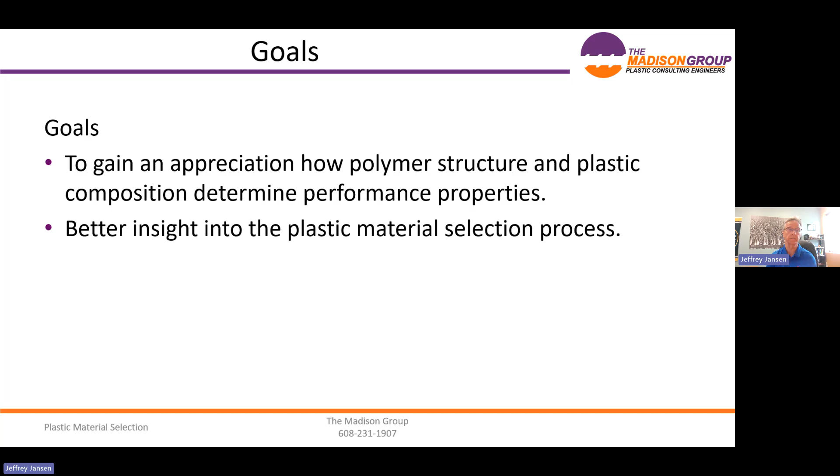It's my goal over the next hour or so that you'll gain an appreciation of how polymer structure and plastic composition determine performance properties, and also get a better insight into that material selection process. We're going to talk about material considerations, plastic structure and composition, and then material selection. So if you were thinking the whole topic would be on material selection and that process, well, that's going to come at the end.

Good material selection that avoids failure requires you to understand a number of things about plastic materials—that's our material consideration. And then you need to understand how structure and composition affect performance, and that's what we're going to be talking about also. Again, to get some background so that we can do proper material selection to avoid failure, because that's the goal here, is to avoid failure.

So why are we talking about material selection? Well, I've been doing failure analysis for about 30 years, and I see the same mistakes being made over and over again. One of the top reasons for plastic failure is improper material selection. I don't mean to imply by that list that it's the number one, but it certainly is in those top 6 things that I see over and over and over again that lead to failure within plastic components.

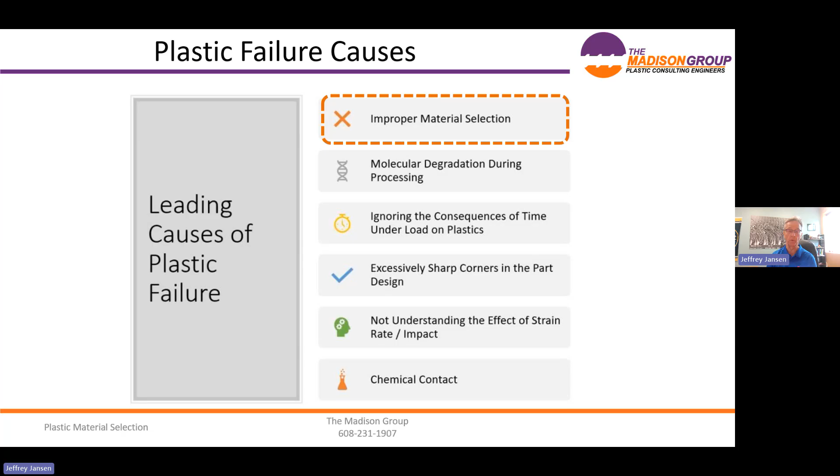And it's not selecting the right material for the application. So again, it's a very, very important topic—that's why we're talking about it today. I also did a survey where we looked at a number of failed plastic parts, and we broke them down into the 4 primary factors for plastic part performance, which are the material, the part design, the manufacturing, and the service environment. Again, those 4 factors are going to determine how the plastic part performs.

When we looked at failures, and I took this survey, material selection and quality played a role in nearly half of the failures that came up. Not saying that was always the primary factor, because oftentimes there are 2 or 3 factors involved in a failure, but material selection played a role in nearly half of those plastic component failures.

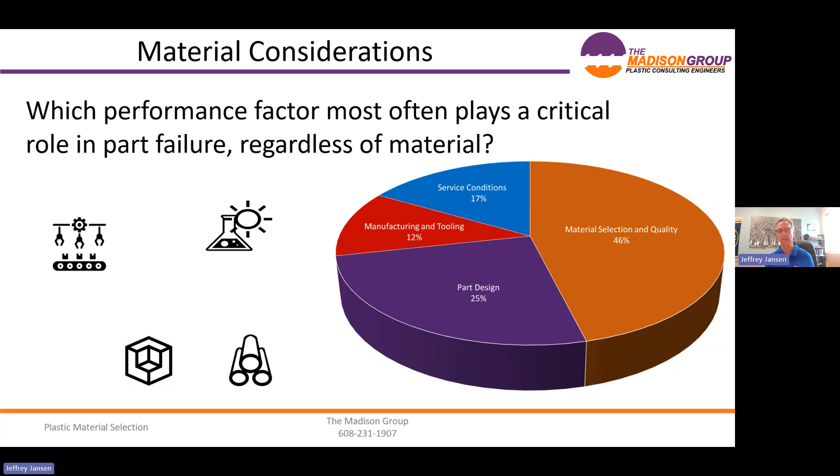So again, reinforcing why it's such an important topic. Material selection is an ordered process to systematically eliminate materials that are unsuitable and then qualify or identify one or two or a small number of materials which are the most suitable for that application.

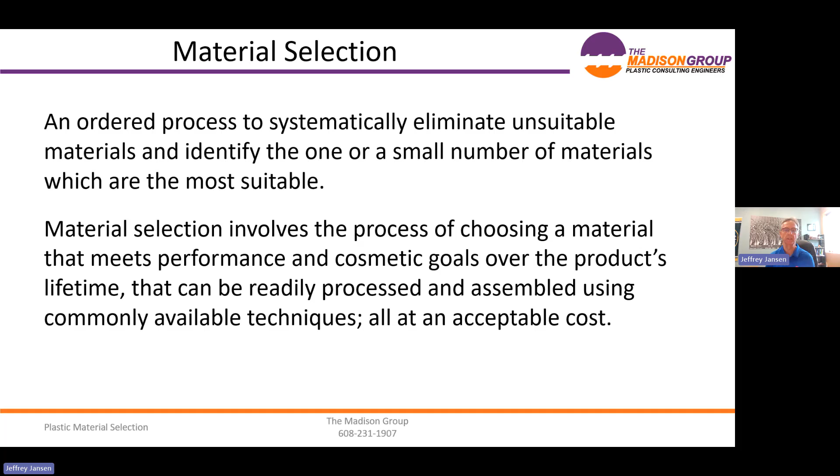We're going to be choosing a material that meets the performance, cosmetic, and really all the goals over the product's lifetime, that can be easily assembled and manufactured at an acceptable cost. So really the whole package is what we're going to be looking at. Later on, when we get to that process, you'll see how it all comes together.

So failures due to poor material selection, as I've indicated, are very common. I think they're essentially related to a lack of awareness and understanding of polymer structure and composition and how that affects performance. Because when we're talking about improper material selection, we're talking about material that doesn't meet performance - and it's not just the end use performance, what it sees in the field, but performance as in meshing with the design and also being manufacturable.

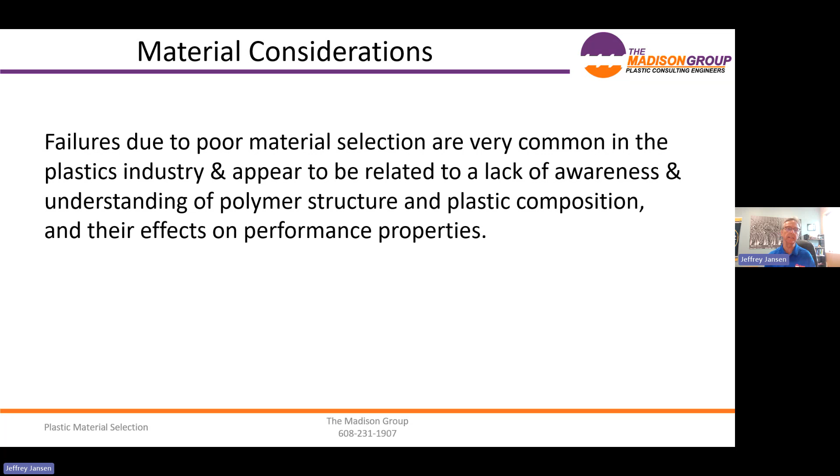So that's really what that plastic material needs to be able to perform. And like I said, I think it all relates back to not having a great understanding of how structure and composition contribute to that performance.

So when we look at material selection as part of design and development, new product development, or the entire product life cycle, it's imperative that designers and engineers understand the fundamental nature of plastics. I'm going to quickly go through - and we could spend a lot more time on each of these topics - but talk about these things that if you're going to do material selection, design parts, or even manufacture parts, I think if you work with plastics you need to understand these key material considerations.

Especially important when you're going to select the material: understanding that plastics are nonlinear viscoelastic materials. This is a fundamental aspect - that plastic materials are viscoelastic, meaning they display both viscous and elastic behavior at the same time.

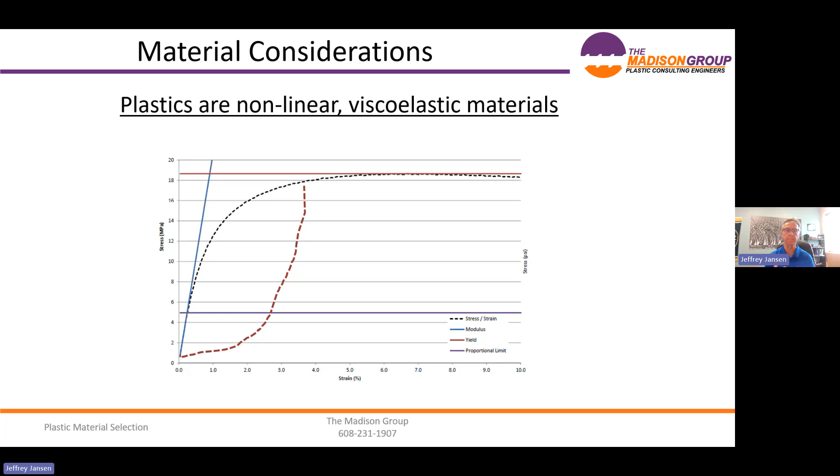They're also largely nonlinear. No matter what property you're looking at, plastics are nonlinear. Certainly it's very clear to see this in a tensile stress strain curve, but no matter what properties we're looking at, we see a lot of nonlinearity within plastic materials.

Plastic materials have temperature-dependent properties. That means whether we assess properties - and I'm illustrating mechanical properties here, but they can be any type of property - whether we're evaluating the material at room temperature, maybe -40, maybe +50 degrees C, those plastic properties are going to be dependent on that temperature.

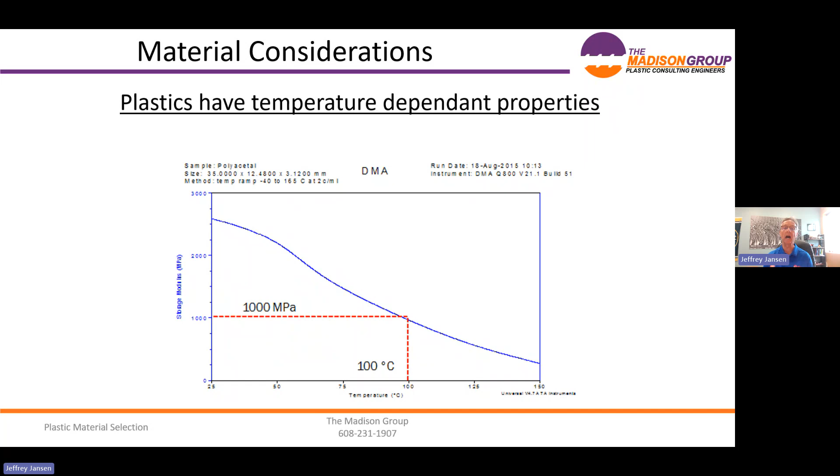And relative to metals, plastic material properties change over a relatively short temperature swing. It's not at all uncommon to see properties shift dramatically over 10 to 20 degrees C, whereas for metals you really have to be talking about 100 degrees C or more before you'll notice an appreciable change in most properties.

Plastics have time-dependent properties. That means not only are they dependent on temperature, but on how long that product is in service. I'm not really talking about molecular degradation, like UV or oxidation - I'm talking about if you place your plastic part under load, the mechanical properties of that part will change over time.

Because they're viscoelastic, time, temperature, and - as we're going to see in just a minute - strain rate are all entangled with each other. That means those plastic properties are dependent on all of those things, and time, temperature, and strain rate all impact the plastic materials in the same way. They're all relatable to each other, again, because they're viscoelastic. So plastic materials have time-dependent properties.

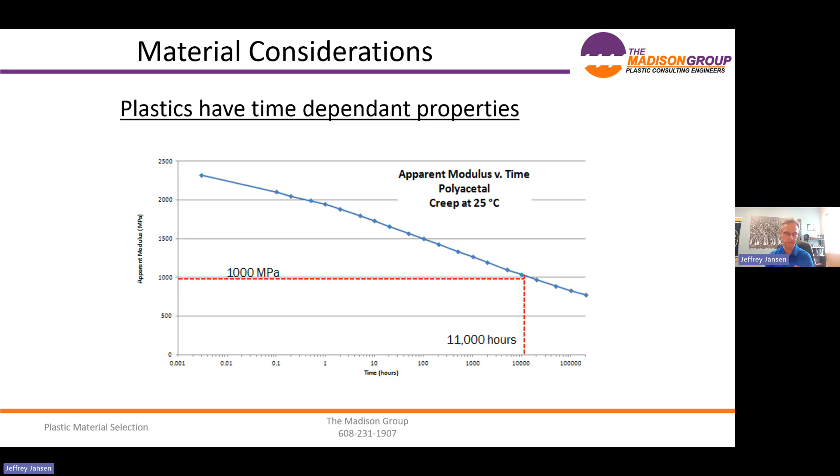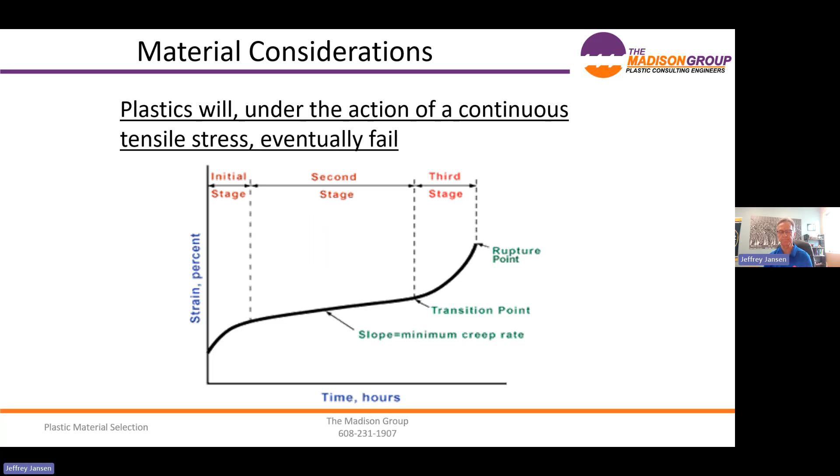And as a continuation of that, if we put our plastic material under continuous tensile stress, that product will eventually fail. Now, maybe in an inordinately long period of time, like 100 years, or it may be within the life cycle of your product - could be 5 years, 2 years, half a year. Again, if you place that part under continuous tensile stress, it will crack eventually.

And the third leg of that stool is that plastic materials are strain rate dependent. How fast we pull or how fast we load a material matters to what its strength is going to be. That's why plastics are very impact sensitive, and a lot of plastics will fail under impact loading. So temperature dependence, time dependence, strain rate dependence.

That means it's kind of where we're going to be looking at when we think about a data sheet. If somebody says, how strong is this material? The only answer that is acceptable is it depends. What does it depend on? It depends on the temperature, how long it's been under load or is expected to be under load, and what the strain rate is. So again, when we start to think about data sheets, they present a nice number for us, but we need to think about what that number really means.

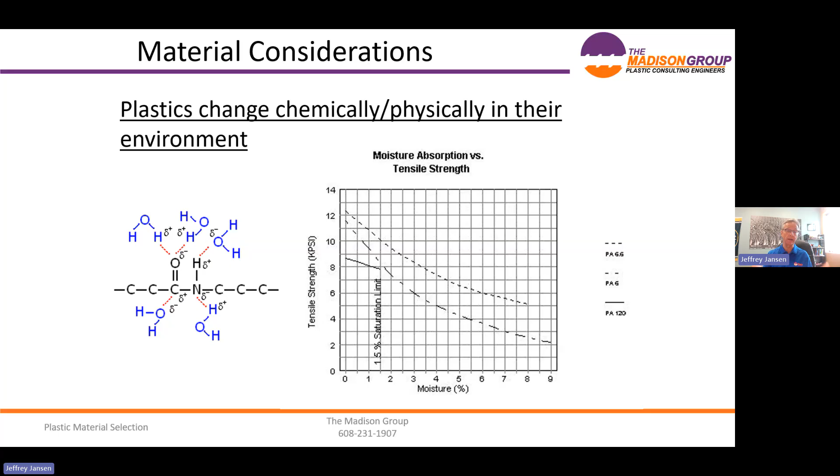Another material consideration is that plastic materials will change chemically and physically in their environment. The best example here is nylon and water. Nylon absorbs water, and when it does that, its mechanical properties change. As it absorbs more water, its impact properties get better, but its strength goes down. So there's a trade-off there: strength versus ductility, dry versus wet. And the same thing can be found with other plastic materials. Nylon and water is just the best example.

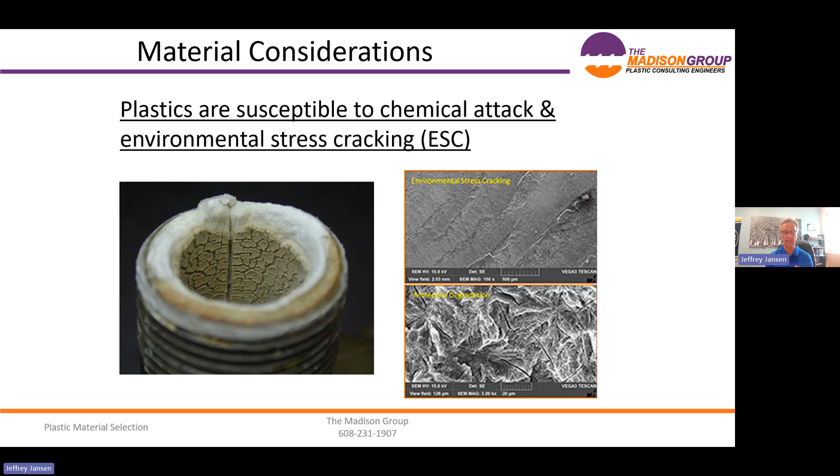Plastic materials are susceptible to chemical attack and environmental stress cracking. Plastics are great materials, but if they have an Achilles heel, it's that they don't play well with chemicals. And when you're going to think about material selection, you need to think about what chemicals are going to be present in that environment.

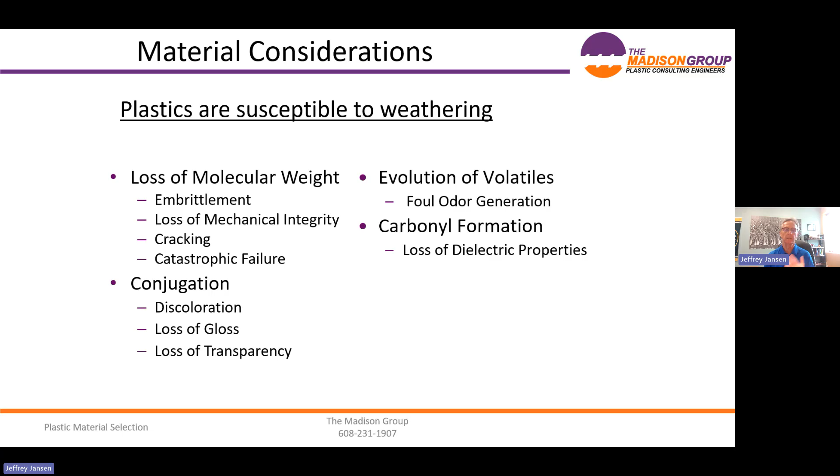Plastic materials are susceptible to weathering. So if we put them outside, they're susceptible to UV degradation and to the rain and other things that are going on. But principally, we're talking about UV degradation. Again, they can degrade through UV. A number of plastics are somewhat resistant, but others will certainly be degraded.

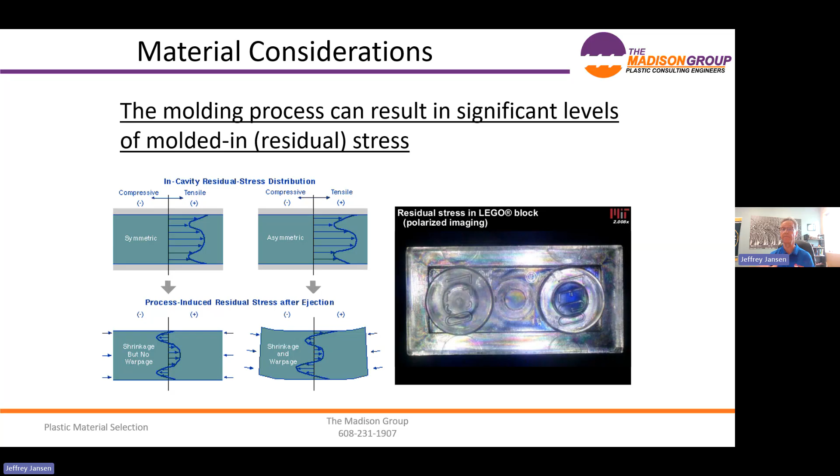The molding process can impart a significant level of molded-in residual stress. And when we think about stress on a plastic part, we have to add both externally applied stresses together with any molded-in residual stresses together. That's the total stress state of that plastic material. So when we mold, we're naturally going to get residual stress in our part. Again, the molding condition can affect how much stress we get through that molding process.

Weld lines, another attribute related more to the molding process - knit lines, weld lines are going to be formed during the molding process whenever we have two flow fronts that come together, particularly egregious in fiber reinforced materials, and our strength is going to be weakest at that knit line location. When those flow fronts come together, we may not get good entanglement of our plastic materials, and if you didn't know that, plastic materials fail mechanically through disentanglement. So if we don't have good entanglement, good fusion at those knit lines, we're going to have an inherently weak location. Again, how strong is your material?

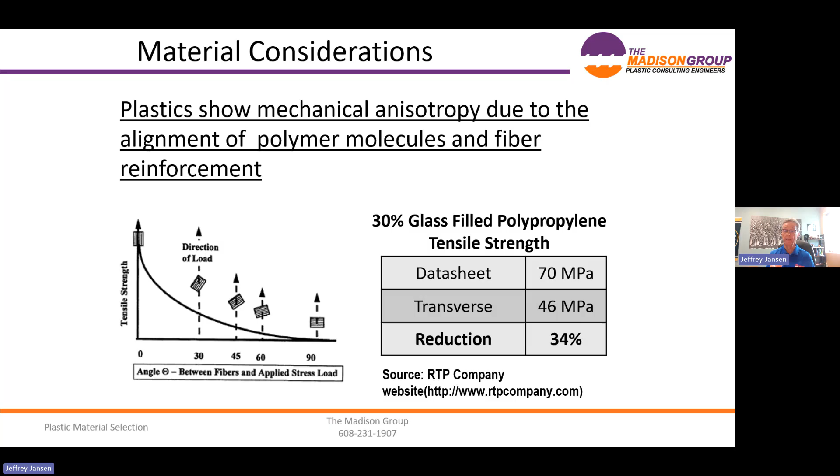It depends. Plastic materials show anisotropy due to alignment of both the polymer molecules and any fiber reinforcement that's present. So if we're going to get tensile strength off a molded tensile bar, that's the easiest thing in the world to mold. All our molecules, and if we have fiber reinforcement, it's all lined up in the right direction. Is that the way that your plastic part is? No, probably not, unless you're molding tensile bars, which I doubt that you're selling a lot of. So on your molded plastic part, think about the strength of that material, the mechanical properties of that material, not necessarily just longitudinal to the orientation of flow, but also transverse to that.

Plastic materials are also notch sensitive. And so when there's a notch, there's typically stress concentration, which focuses and multiplies any stress on our part. So again, our stress state may be higher than we anticipate it's going to be.

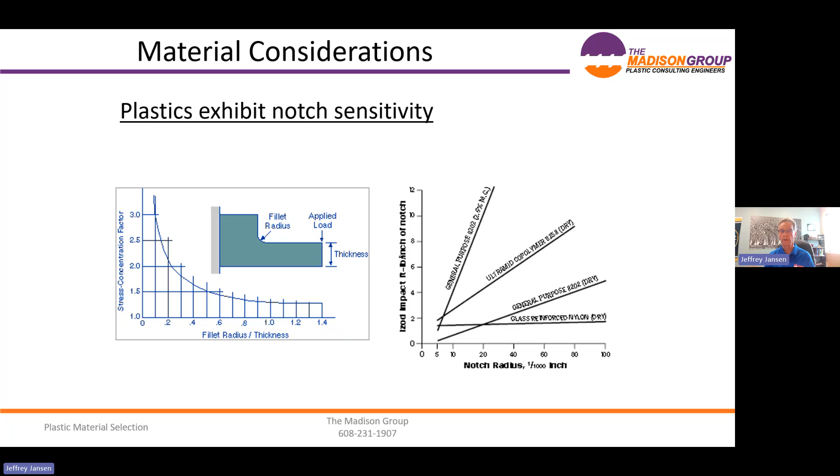Now, I know I went through these relatively rapidly, but it's essential if you're going to be doing material selection that you have a good command of all of these things and how they affect plastic materials, so that then you can say, okay, I'm going to look at my design, I'm going to look at my manufacturing, I'm going to look at my service environment, and now I can start to select a material that's going to weave those three together and not fail.

So we talked about those inherent properties. Now we're going to talk a little bit about composition, because that plays an equally important role. In the material selection process, we have to have an understanding of polymers and additives and their properties.

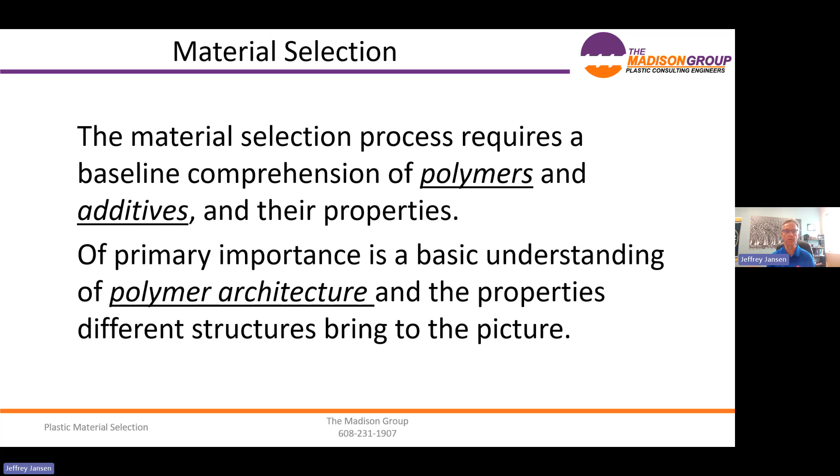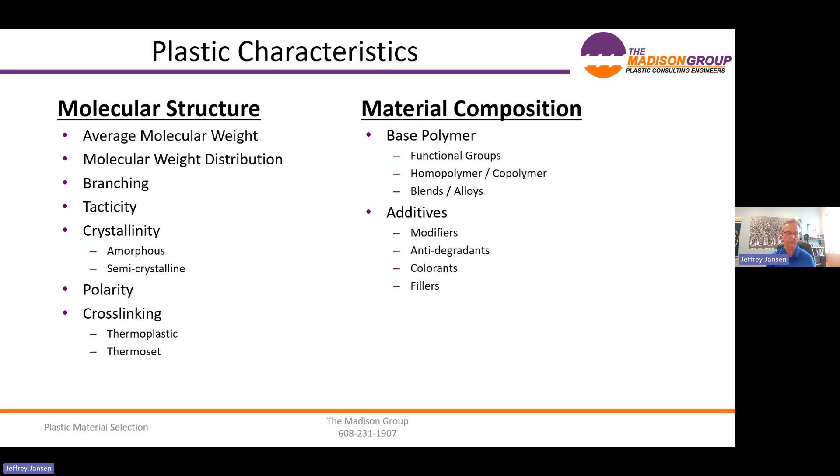This is essential to selecting the right material. We need to know how the polymer architecture, the base polymer in our plastic, contributes to overall performance, and how additives can alter that performance. If we had more time, we'd cover all of these things in much greater depth. We're going to walk through them relatively quickly today, the highlights, so you can understand the key things that determine how that plastic material performs.

There are essentially two ways to form a polymer, to undergo a polymerization reaction. One is addition polymerization, where we're opening up a carbon-carbon double bond. Here we have styrene, with a carbon-carbon double bond. Through the polymerization reaction, we open that up and form polystyrene, building blocks onto that polymer. We start with one monomer, styrene, to get polystyrene.

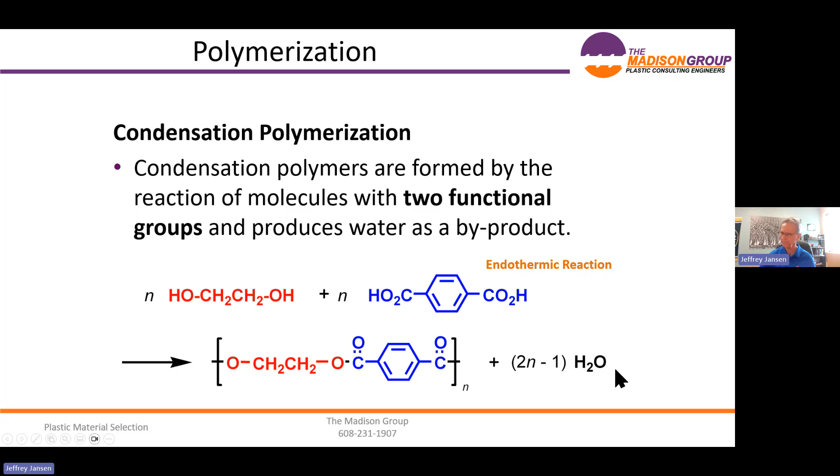The second general way is condensation polymerization, where we start with two different materials. Here we're making PET, starting with ethane diol and terephthalic acid, and we get PET out of it. We react this OH functionality with this acid functionality, and that forms a bond, and we build that way. We also form some water that comes off of our molecule.

It's not essential that you understand the depth of polymerization, but the two different ways to polymerize materials give us different characteristics. The disadvantage of condensation polymers, where addition polymers have an advantage, is that condensation polymers are more difficult to produce, meaning higher cost, generally higher density, which also contributes to higher cost. They're more difficult to process because they typically have a higher melt viscosity, and it's critical that we dry condensation polymers, otherwise we can undergo hydrolysis right in the injection molding machine. All of that means higher cost.

Condensation polymers typically also have a narrower processing window, and we can't get extremely high molecular weights with them as we can with addition polymers. Those are the disadvantages, principally revolving around cost. The advantages are that they give us a wide range of mechanical and thermal properties. This is the material you'd go to if you're thinking about replacing a metal or need a high-end performance material—you're going to go to condensation polymers. So that typically is the trade-off: cost versus performance, condensation polymers versus addition polymers.

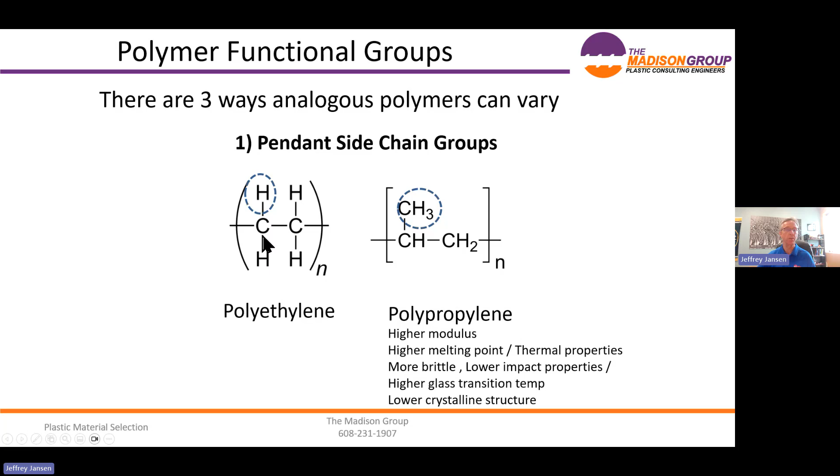When we put these building blocks together, there are a number of ways that relatively similar materials in the same general family can differ. Here we have polyethylene and polypropylene—the only difference is that one hydrogen from polyethylene has been replaced with a methyl group, CH3. Otherwise the backbone is the same, just carbon units with this small difference. That means polypropylene has a higher modulus, it's stiffer, has a higher melting point and better thermal properties. Conversely, it's more brittle, with worse impact properties because it has a higher glass transition temperature, and somewhat lower crystalline structure. All those changes just because of this small difference between these polyolefin materials.

Another way analogous materials can differ is by what's present on the main chain. Here we have PET, polyethylene terephthalate, with 2 carbon units between our ester groups, and PBT, polybutylene terephthalate, with 4. Despite this relatively small change, there's a significant difference: PBT has a lower modulus, is more flexible, but also has higher impact resistance. It has a lower melting point, so lower thermal properties.

And a more crystalline structure compared with PET. It's easier to organize that material into structures. So again, both of these would be thermoplastic polyesters, very similar materials.

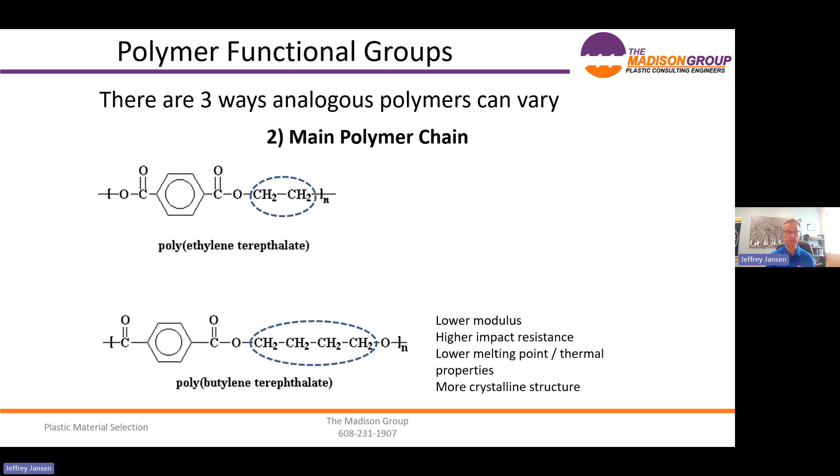The same can be true with nylon. We've got nylon 6, or 6.6, or 12. Again, melting points are going to be different, glass transitions are going to be different, water absorption levels will be different. All the mechanical properties of these materials will be different. Same kind of thing with what's present in the main chain.

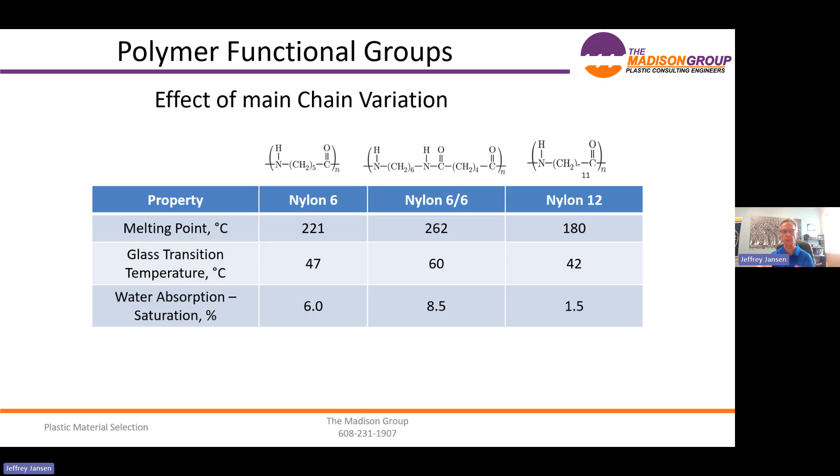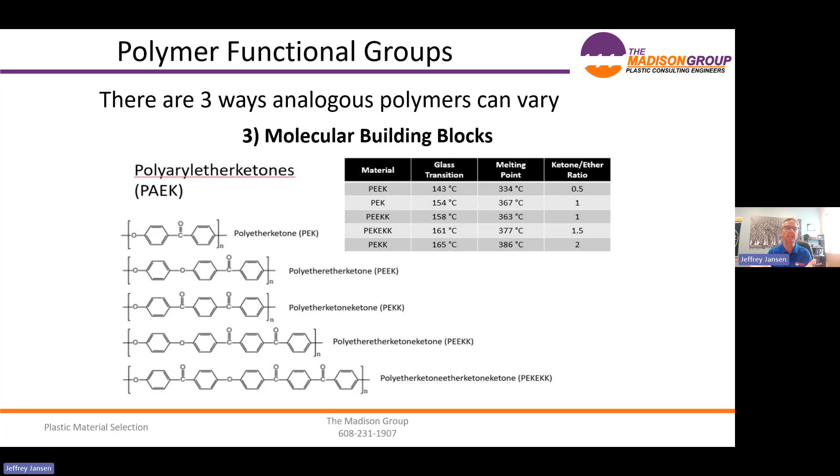And then finally, the building blocks and putting them together in different ways. So these are polyaryl ether ketones. The most common material in this family is PEEK, P-E-E-K, but there are a number of different ways to put ethers and ketones together and benzene rings together. That's really all these are made out of. Different ways we can put them together to get different glass transitions, which determines what temperature that material goes from being very stiff to being much more pliable, and the melting point, so high-end temperature performance. That's all based on what we put them together and the ratio of the ketone and ether functionalities. So again, small differences within these polyaryl ether ketones make a big difference in performance.

Our next topic, now that we're past polymerization, is branching. This is most prevalent within polyethylene. We've got high density polyethylene, low density polyethylene, and everything in between. Really, the difference between low density and high density polyethylene is how many side chains we have coming off. With low density polyethylene, we have large and many side chains coming off. That's why it's called a branched chain, because there's a lot of branches. High density polyethylene has some branches, but they tend to be very small and far between. That means we can pack more high density polyethylene into space. That's why it's high density, because we've got less of those side chains getting in the way of packing things nice and neatly.

The implications of that are mechanical properties associated with crystallinity. The modulus on high-density polyethylene and the strength on high-density polyethylene are both going to be higher than low-density polyethylene because of that. So particularly with polyethylene, think about branching, which relates directly back to density or specific gravity. Another material this is important for is polyphenylene sulfide. There is linear and branched PPS, and again that will give you different performance properties out of it. Not quite as common as polyethylene, but still a material we need to think about as linear or branched polymer.

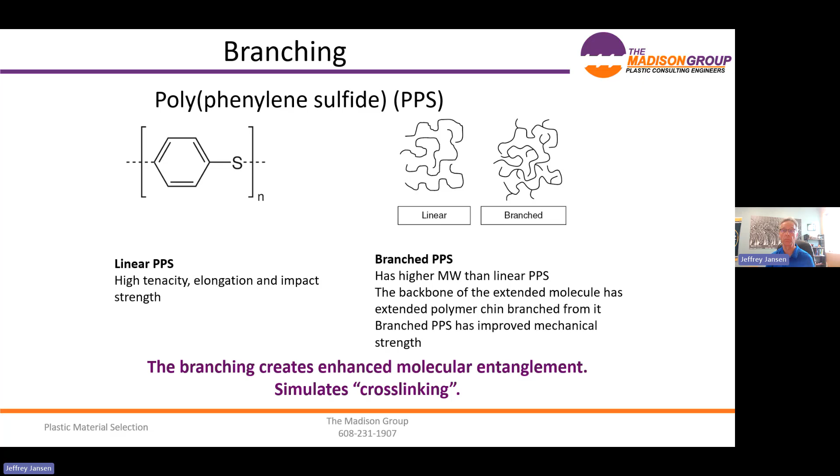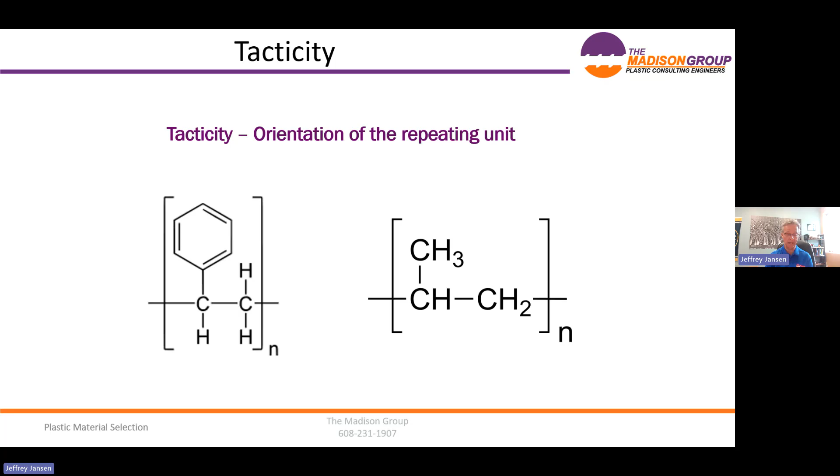For atactic polystyrene, which is what we talk about when we talk about crystal styrene or polystyrene in general, that's atactic. Atactic means there's no organization to this benzene ring - sometimes it's up, sometimes it's down, it alternates randomly. Because of that, the material is amorphous. It has no ability to form crystals, and so it's amorphous, with a glass transition of about 100 degrees C.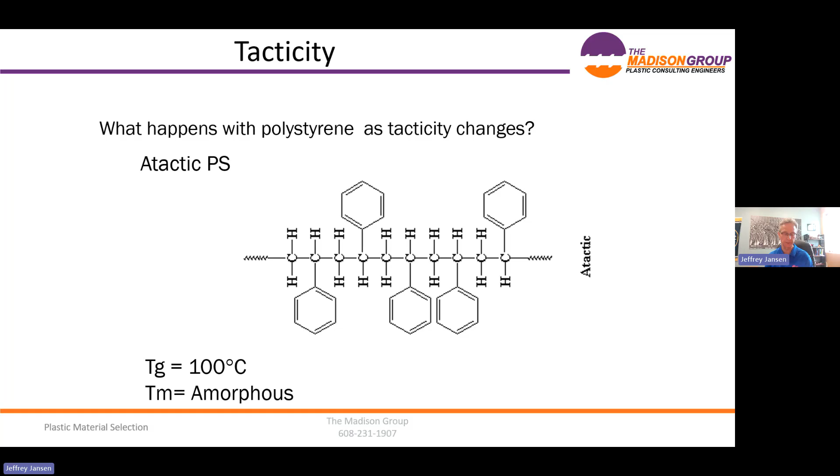Another material that is commercially available, a great material but underutilized, is syndiotactic polystyrene. Syndiotactic polystyrene means we alternate one benzene ring up, then down, then up, then down - how it's organized on the ring. That's got to do with the catalysts used during the polymerization process; they can orient that benzene ring. Because of that orientation, alternating up and down, the material can form crystals. That means it has a melting point, actually a relatively high melting point, 270 degrees C. It still has that glass transition at 100, but unlike atactic polystyrene, which loses all load-bearing capability because it's amorphous at the glass transition, there's still some crystal structure here, so there's still some load-bearing capability above 100 degrees.

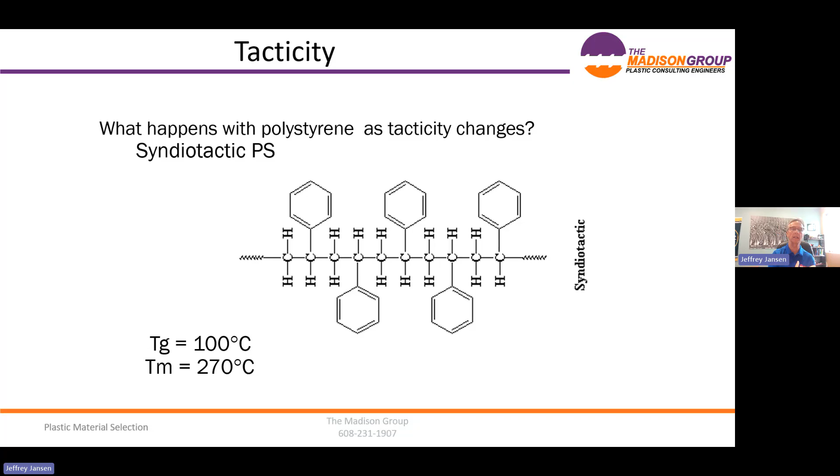So tacticity for non-symmetrical molecules - polypropylene and polystyrene are the two most common - is going to affect how that material behaves. So again, not all polypropylene is the same, and not all polystyrene is the same.

So if we were dividing our world of polymeric materials, we would first divide them by thermosets versus thermoplastics. Now we're focusing today on thermoplastic materials. So when we divide that world in half, we're going to talk about amorphous versus semi-crystalline. We just talked about it with polystyrene and how those materials can be different. Let's dive into that a little bit more.

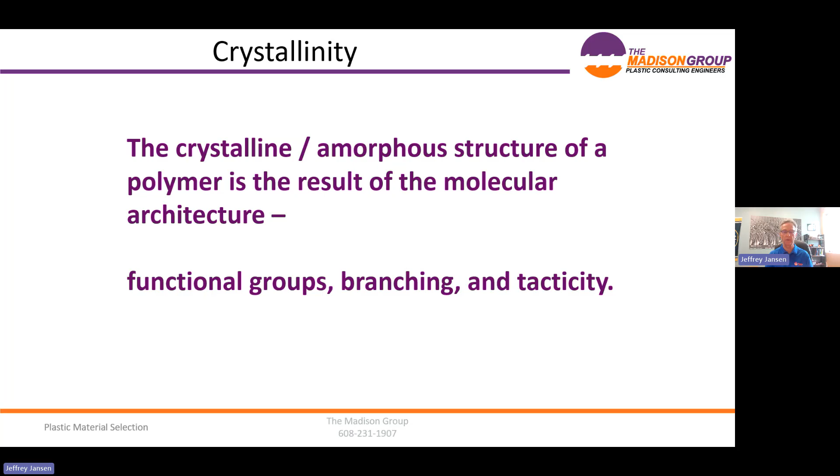Whether a material is semi-crystalline or amorphous, and if it's semi-crystalline, how crystalline it is has to do with the functional groups present from our building blocks, if you will, from polymerization. It's got to do with the branching, and it's got to do with the tacticity, the things we've talked about already. So that's going to determine whether a material is amorphous or semi-crystalline.

With amorphous materials, we have a totally jumbled structure. There's no organization to that structure. There are no crystals, okay? Totally random, totally jumbled. With semi-crystalline materials, we have some crystalline structure. Now, we still have a significant amount of jumbled mass of molecules, amorphous content, but there are some levels of crystallinity, some levels of organization to that material.

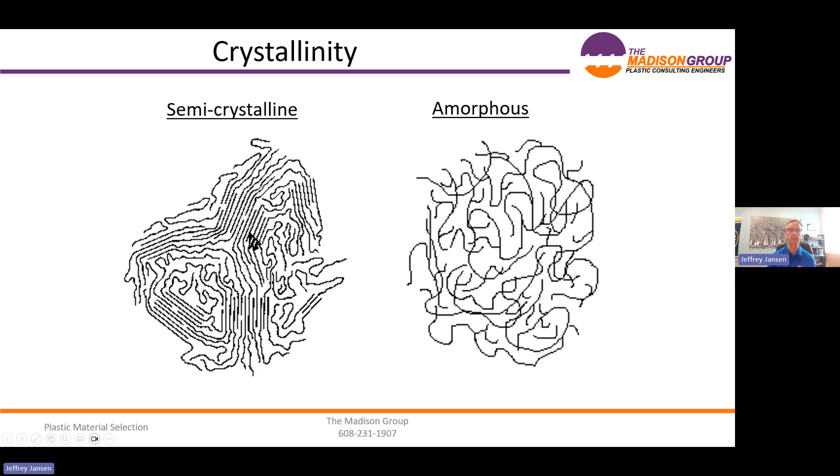So an amorphous material, like I said, totally random, totally jumbled structure. Because of that, it only has a glass transition temperature. At that glass transition temperature, all load-bearing properties are going to be lost. That material would become essentially a pile of ooze, okay, at the glass transition.

So for polystyrene, about 100 degrees. Polycarbonate, about 150 degrees. Polysulfone, about 225 degrees. Those are the temperatures above which that material will lose all load-bearing capability.

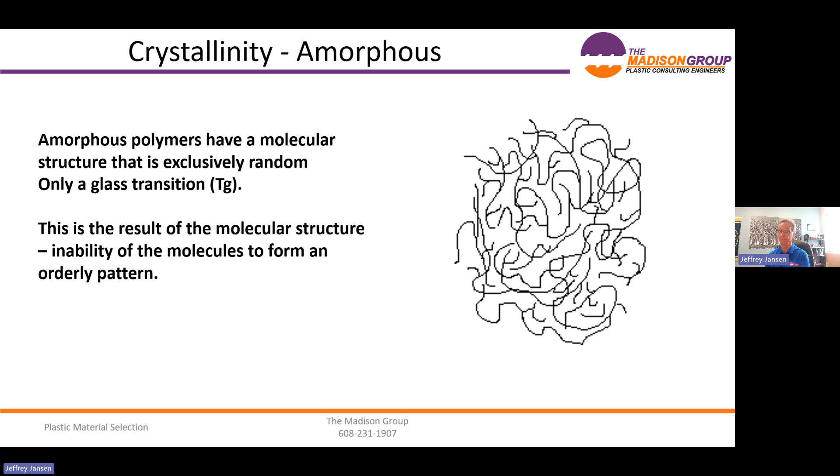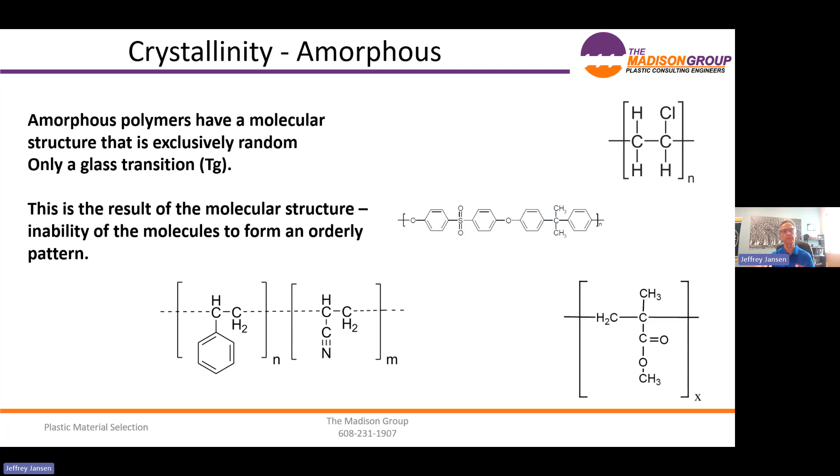Does that mean you can use them right up to that temperature? No, because of creep and time dependency that we talked about. But again, that's where that short-term - having some structure versus being, like I said, a pile of ooze - will come in, okay? Again, because of the structure of materials like PVC, like acrylic resin, like SAN, those materials are unable to form crystalline structure, and so they are amorphous.

Some materials, again, are semi-crystalline. We use the word semi-crystalline because there is no such thing as a 100% crystalline polymer. So these semi-crystalline materials still have a significant amount of amorphous content. Because of that, they have a glass transition, and their properties will change above that.

For example, nylon 6 has a glass transition temperature of about 60 degrees C. So below 60 degrees C, it's going to be relatively stiff, okay? Above 60 degrees C, when we get to that glass transition, now those amorphous molecules can get more movement. That material is going to get considerably more pliable, okay? So that's important to understand - that they have glass transitions.

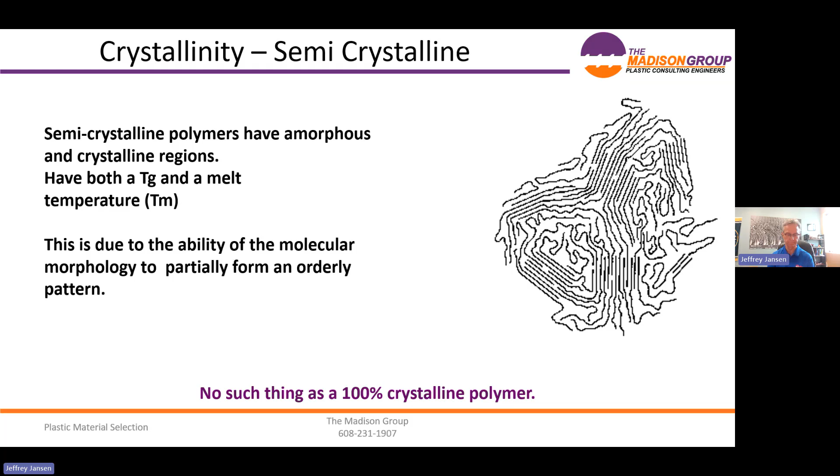Semi-crystalline materials are going to be opaque or translucent because the crystals interfere with the ability of light to get through the material. Amorphous materials are transparent. Semi-crystalline materials give you better organic chemical resistance because that crystalline structure keeps the chemicals out of the molecular path, or out of the structure of the polymers. Amorphous materials have lower organic chemical resistance.

Semi-crystalline materials tend to give you higher strength, higher stiffness - so higher tensile strength, higher modulus materials. You get better ductility out of amorphous materials, okay? You get better fatigue and creep resistance, as a general rule of thumb, out of semi-crystalline materials, but you get better toughness, better impact resistance out of amorphous materials. Lower density for amorphous materials, higher density for semi-crystalline materials because you can pack more - they can get those molecules together more - and accordingly, higher mold shrinkage for semi-crystalline materials.

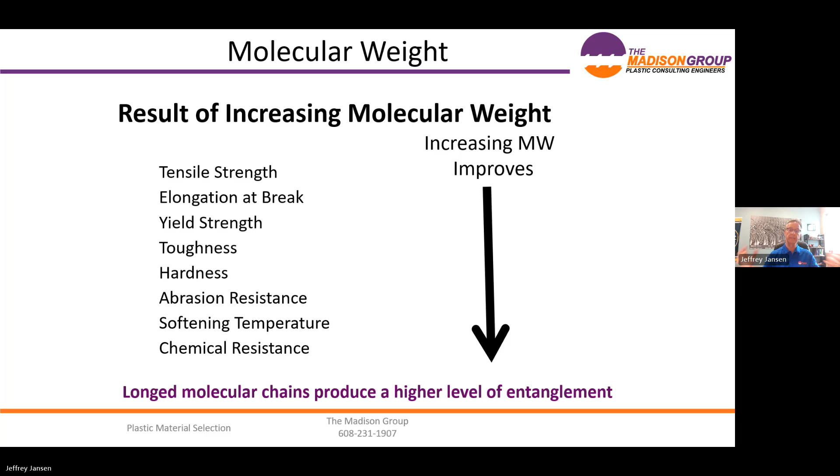When we select a higher molecular weight material, a lower melt flow rate material, our tensile strength is going to be better, and at the same time our elongation at break is going to be better. So strength and ductility move in the same direction, which hardly ever happens, but it happens with a higher molecular weight resin. We get better yield strength, better toughness, better hardness, abrasion resistance, better softening temperature, and very importantly, better chemical resistance. All of this comes because we have a better level of entanglement in a higher molecular weight material - longer chains that can entangle into each other.

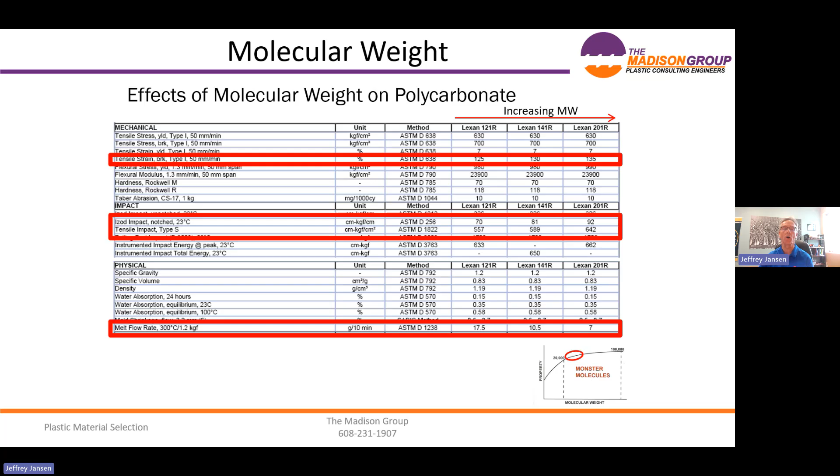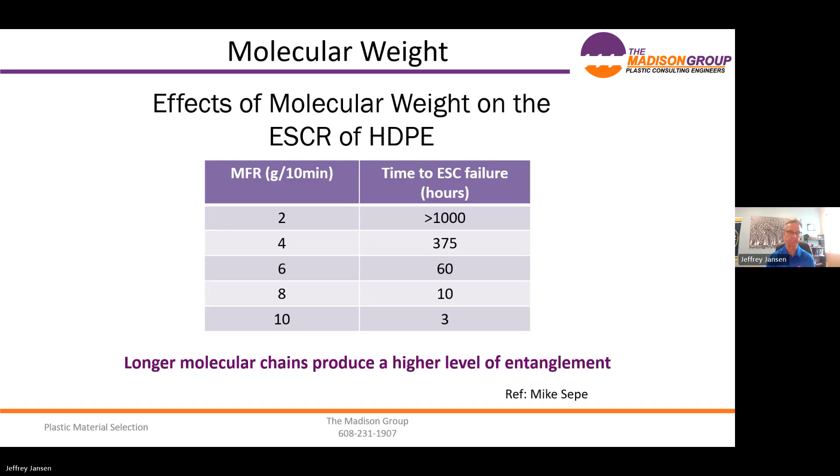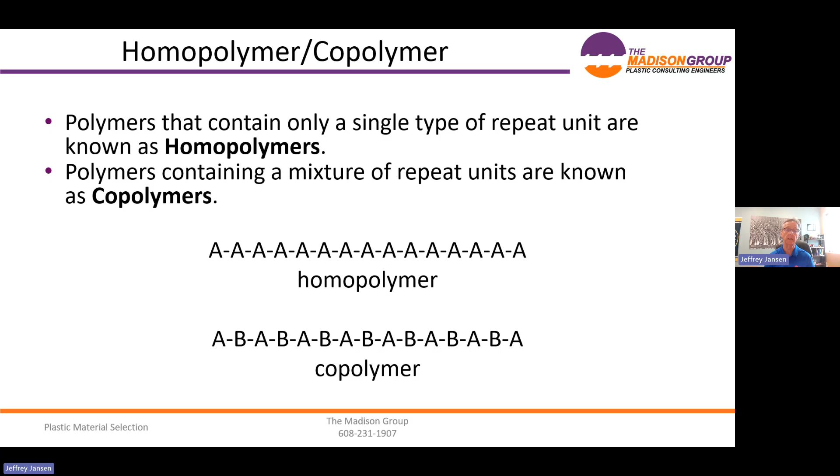When we think about polymeric materials, we can either have homopolymers or copolymers. Homopolymers simply have the same building block, or repeat unit, over and over and over again. Copolymers have 2 or more building blocks put together during the polymerization phase that can alter how that material behaves. So copolymerization is very common to tweak our material properties. In fact, this is one of the areas resin suppliers are working on very diligently to create new resins by copolymerization.

For example, polypropylene is copolymerized with ethylene. When we do that, that copolymer gives us better impact resistance, better low temperature properties, at the trade-off of stiffness and strength, because polypropylene homopolymer is stiffer and stronger. There's always a trade-off, a compromise. Polyacetal copolymers have better oxidative stability compared to the homopolymer, and better impact properties, but again at the expense of strength and stiffness. So when you're looking at copolymers, you need to think about what you're giving up for what you're getting.

One of the best examples of a copolymer - actually a terpolymer because it's a 3-function system - is ABS: acrylonitrile, butadiene, and styrene. Each one brings something different to the table. With ABS, you can have almost an unlimited number of different grades, because you could have something right in the middle, something in one corner, something over here - lots of different ways to put acrylonitrile, butadiene, and styrene together to get a material. So not all ABS is the same. It depends on the relative levels of acrylonitrile, butadiene, and styrene, and that certainly has an effect on performance.

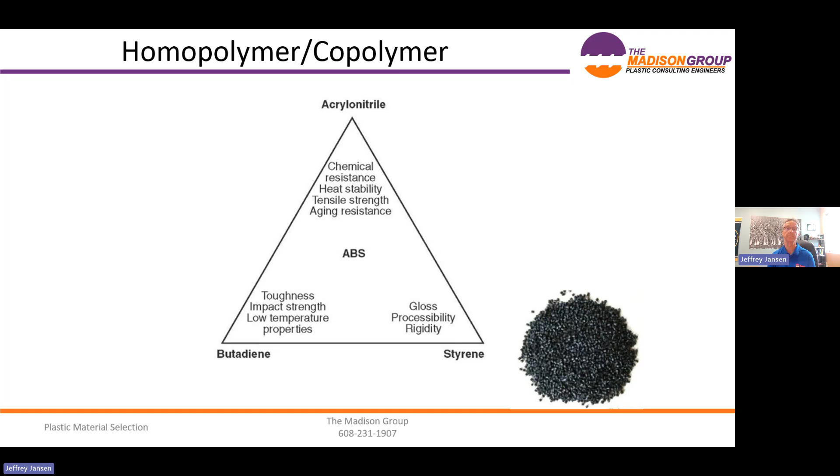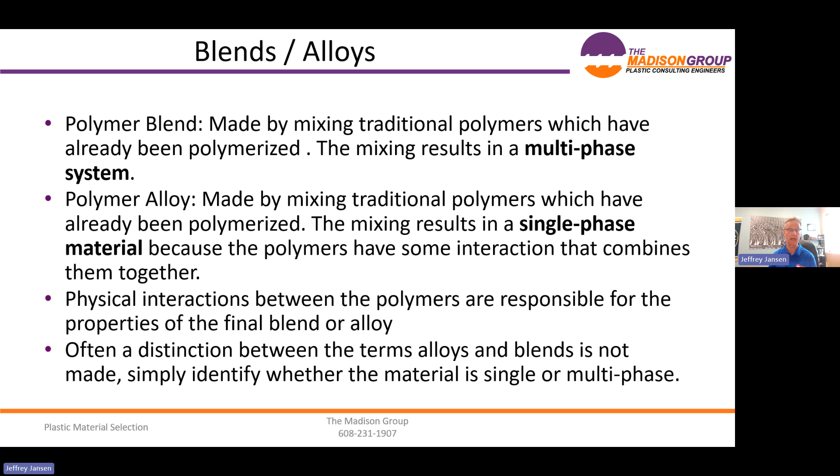Kind of the twin sister of copolymerization is blends and alloys. Copolymerization is done during the polymerization stage, but blends and alloys are just that - you take 2 or more polymers and blend them together mechanically. Not something you'd do at the injection molding press, but something done under very exacting conditions by a compounder. Much like copolymerization, you do that to tweak the properties you want. This is another area resin suppliers are working on to create new resins, and there's a lot of different blends and alloys available - this is just a small list, there are hundreds and hundreds of different types out there.

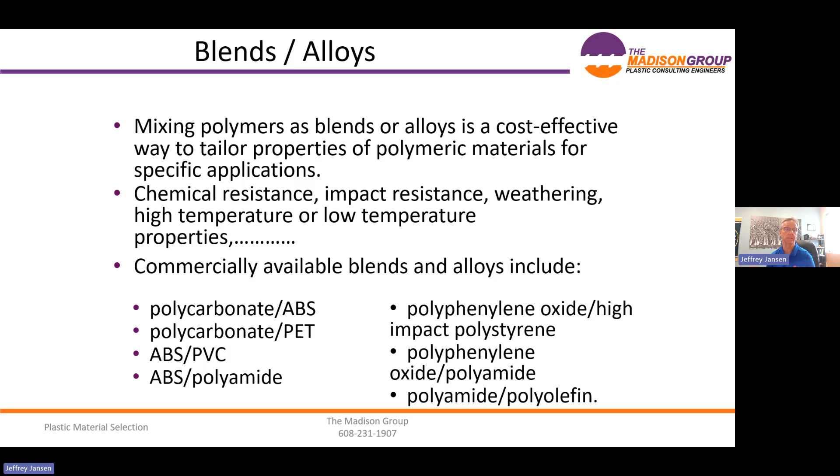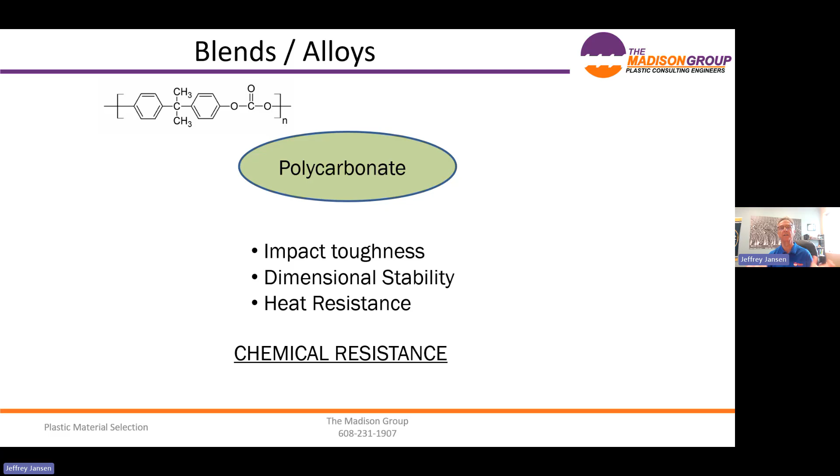So why might we want to do that? Say we're making a medical device, a handheld medical device - we have a choice. One of the materials we can use could be polycarbonate: great impact resistance, good dimensional stability, good heat resistance. Why does it have those? Because it is an amorphous resin. What's the trade-off with amorphous resins? Well, they tend not to give us great chemical resistance. In fact, polycarbonate, if it barely looks at an organic chemical, is going to undergo environmental stress cracking. So that may not be the best choice.

Another material we might be able to make this device out of is PBT. Great chemical resistance because it's semi-crystalline, high strength, high stiffness, good flowability. But because it's semi-crystalline, what's its weakness? Well, impact resistance. If we drop this, it might break.

So what kind of resin might we use? A very common blend is polycarbonate PBT. This material is used in a lot of different applications. Does that blend have all of the impact resistance of polycarbonate? No, it doesn't. Does it have all the chemical resistance of PBT? No. But that blend brings some of both to the table, so we might have a resin suitable for our application that gives us some impact resistance and some chemical resistance.

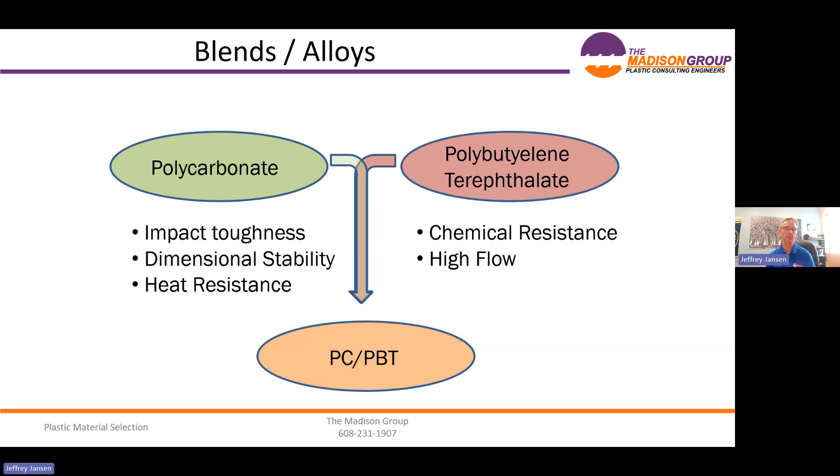Again, a lot of different things to think about with blends and alloys. It's a little bit like a trade-off. So additives - we could spend a week talking about additives, but just understand that when you put an additive in, it's going to change a property that you're trying to modify.

You can add flame retardants, which will change how quickly the fire spreads or what it does when it starts on fire. But as I walk through these, there are always trade-offs, okay? You get the flame retardancy, but is it also doing something else to the property? Many flame retardants make a material more brittle, so it's not going to have the same elongation to break or impact resistance as a non-flame retardant grade. So that's something you want to be cognizant of - what's my trade-off for adding this?

So flame retardants - probably the most common additive used in plastic materials is anti-degradants and stabilizers. Just about every grade, in fact I think every grade of plastic sold has some level of antioxidant so it can withstand the injection molding process. And so you can have antioxidants, antiozonants, UV stabilizers, hydrolysis-resistant additives.

There are additives to prevent most types of degradation. Again, you have to think about what your application is. What is the best package in order to be able to stabilize that material? How much do you need?

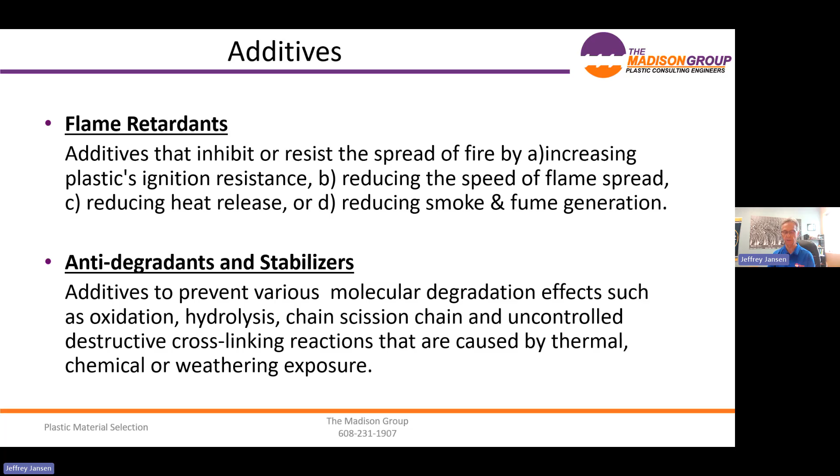Colorants - plastic materials are great because they offer the ability to have aesthetic properties that we don't really get without having to paint, and you can do that for color, fluorescence, a lot of different things. You can modify that performance. Again, you need to be thinking about your properties. For example, blue pigment added to a semi-crystalline material tends to make that material more crystalline and a little bit more brittle.

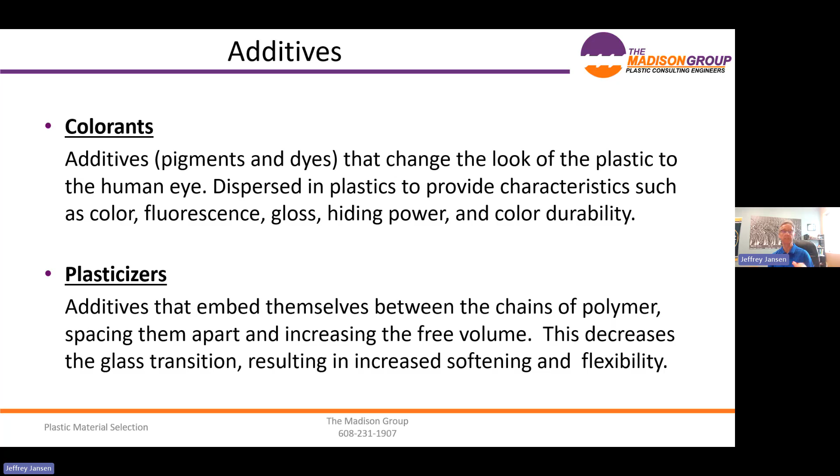Plasticizers are materials that make the material more soft and pliable. It's the difference between PVC pipe, which is hard and rigid, and PVC electrical cord, which is soft and flexible. Again, we can add some of that.

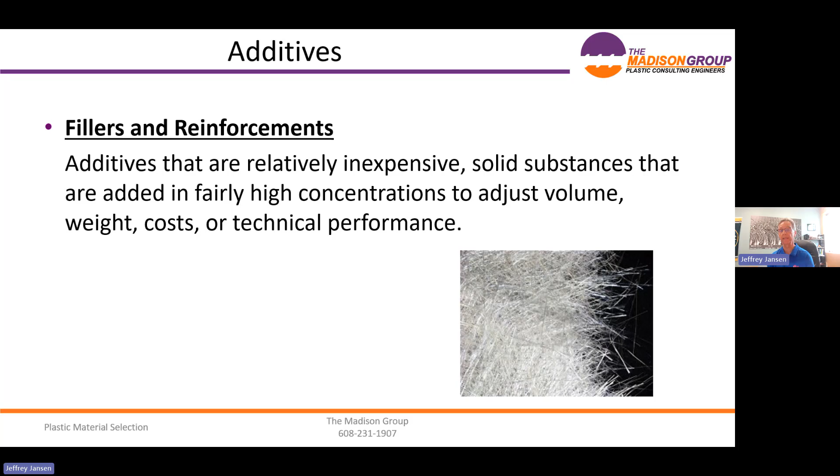Fillers and reinforcers - a very, very common material, probably second after stabilizers. Again, they can help adjust mechanical properties, physical properties, and in many cases take cost out of the overall resin. Be aware there are two different types. Reinforcing fillers improve mechanical properties - these are fibers, high aspect ratio minerals, like glass fibers, carbon fibers. They're going to build strength and stiffness into our material.

Then there's non-reinforcing fillers. They basically add bulk and help take cost out - things like glass beads, kaolin clay, talc, calcium carbonate. They may add a little bit of stiffness, but they can actually bring the strength down. So they won't add strength, but they will take some cost out of the material.

Nucleating agents and clarifiers change the appearance of the material. And then finally, a whole host of specialty additives - a lot of different things we can add to that material. Okay, so I'm done with that first part.

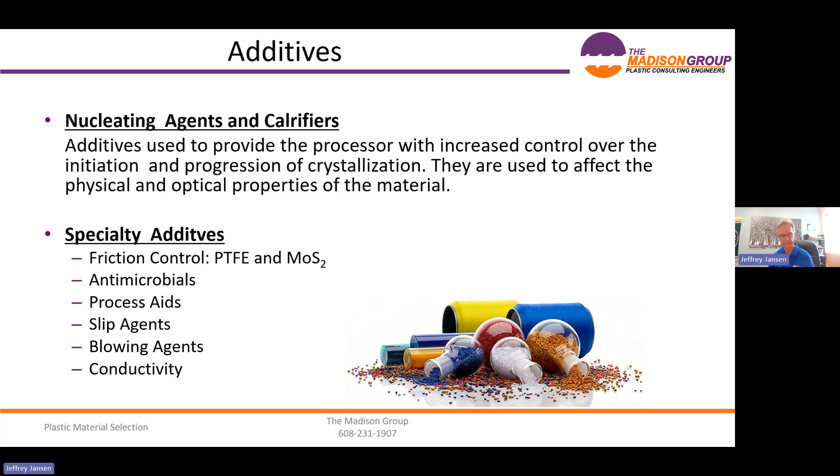We talked about those essential material characteristics. We talked about the composition of the material. Let's get on now to the actual material selection. I'm going to start by saying there is no defined absolute recipe. If you came here thinking that I'd be able to say, do this, do this, and boom, you come up with the right resin - that's not really the case. There is no absolute recipe. There's no playbook for material selection.

It truly is half art, half science. There's a lot of experience that goes into it, and there's also, again, looking for the science behind it. So step one, where you always want to start - I said there was no absolute, but I think this is an absolute - where do you want to start?

You want to define the requirements of the application, not just the service, but also, because of my design, what are the requirements of this material? If I have sharp corners, well, I certainly want to stay away from a material that is sensitive to that. Processing—how am I going to process this material, and what does that do for my material selection? How do I assemble or install it, and how does that impact material selection? So you want to think about all of these, and then finally service: what is it going to see? Temperature-wise, mechanical property requirements, weathering, things like that—all of those kinds of things that, once we put that product in the field, what's it going to see? We need to think about all of those as we start to define the requirements of the application.

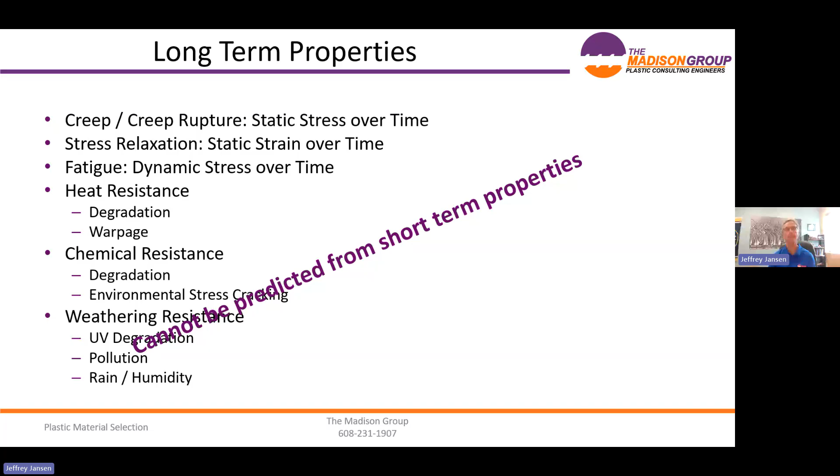For example, if we're comparing two materials and one has a higher tensile strength, that does not mean it's going to have a better fatigue resistance than the other material. In metals, sometimes you can make that jump. In plastics, absolutely cannot make that leap. Long-term properties, those things important for our application, can generally not be predicted from short-term properties.

So we have our application requirements. In order to avoid failure, we need to be able to match them to some property data. This leads to data sheets. This is one of the things we go to, right? We pull a data sheet and we're going to start searching, what are the properties of this material?

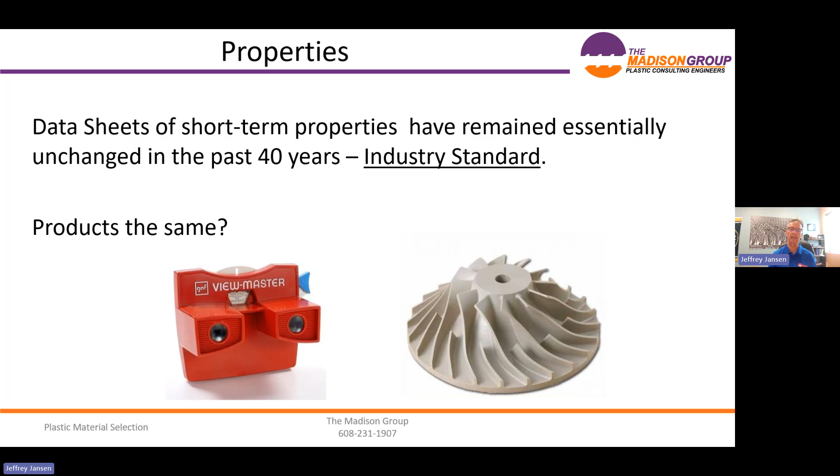Property data sheets have essentially remained unchanged over the last 40 to 50 to 60 years. They're almost like an industry standard. But back in the 60s and 70s, we were making things like this View-Master - I had one of those, I'm old enough to have had one. Again, toys, that's what we were making. Now we're making high-end aerospace parts, demanding medical applications. But yet the data that we make material selection decisions on doesn't seem to have changed over 40, 50, or 60 years.

What do we get on data sheets? Well, we get tensile strength at yield, usually at room temperature, elongation at yield or break, again room temperature, modulus, room temperature, heat deflection temperature, which is a totally useless property. If I had more time I'd go into that, and I'll give you my email address at the end if you want to talk about why I think that's a bad property. Notched IZOD or Charpy, which is a pendulum test, again not the best impact test for plastics. Coefficient of linear thermal expansion, usually at one temperature, and electrical resistivities.

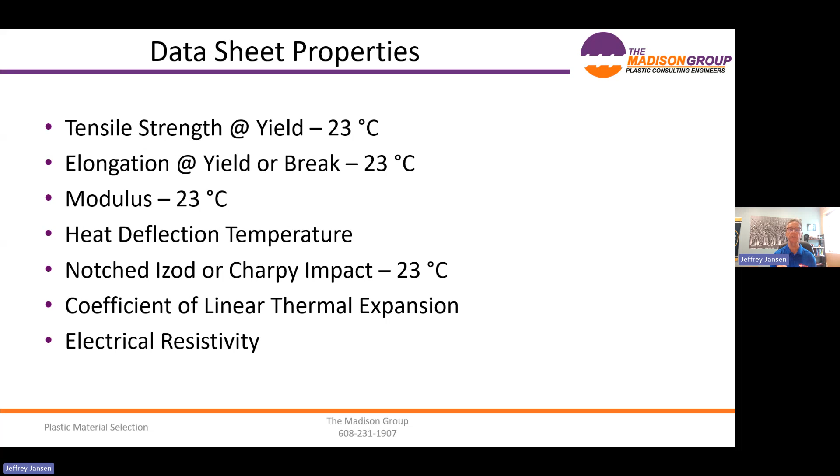What else do we get on data sheets? Well, we get impact resistance, strength, stiffness, almost exclusively at room temperature. Where's your product used? Yeah, many of our products are used at room temperature, but a lot of them are used outside - in the summer it's very hot, or in the winter where it's very cold. So we need properties across the temperature range.

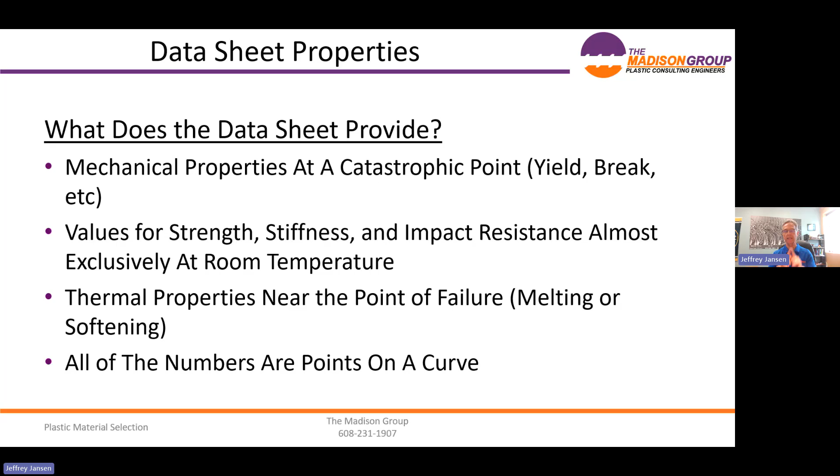We get thermal properties like HDT, essentially defining the failure near the melting or softening point of the material. Again, how does that help us? I'm not sure how that really helps us. And remember that all of the numbers we get on a data sheet are points on a curve, but we're not getting the full curve - that would be helpful. Remember, as we talked about earlier, plastic material properties change with temperature, they change with time, they're nonlinear, and they're influenced by the conditions we expose that product to. So better decisions are made when we get better graphical-based data rather than tabular data.

So what do we need? I'd like to see stress strain curves at various temperatures, and not just numerical values, but the actual curve, and not just the curve but the actual Excel sheet to produce the curve. I'd like to see modulus versus temperature, like a DMA curve. I'd like to see coefficient of expansion versus temperature, how that changes. Instrumented impact testing, multi-axial impact testing data, thermal properties with temperature, isochronous stress strain curves like you would look at for creep data. I want to see fatigue data. I want to see viscosity versus shear rate data to help me with molding.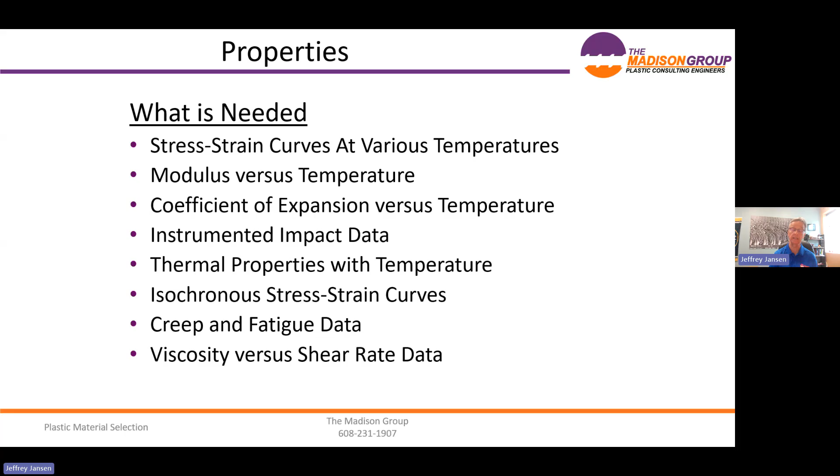These are the kind of things that I want to see, and the only way to get them is to demand them from our resin suppliers. When you're thinking about using a resin, ask for this type of data, and in fact if you can, say 'I need this data or I'm just not even going to consider your resin.' I think that's a reasonable statement. So again, back to kind of where we started before I jumped on my soapbox.

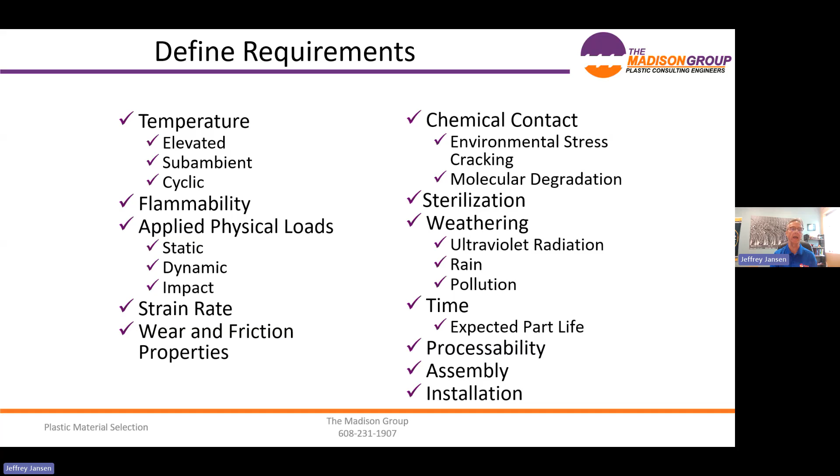We need to define all of the requirements for that material. There's a lot of them. Again, checking boxes off, looking at whatever needs to be required from our material to be successful.

Step 1 was defining those requirements. Step 2 is to conduct an initial survey to look at potential candidate materials, polymer families. We're going to review candidate families for strengths and weaknesses, look for similar products used out in the field, what general families are they using, and look at whether there are new material developments that offer us new opportunities.

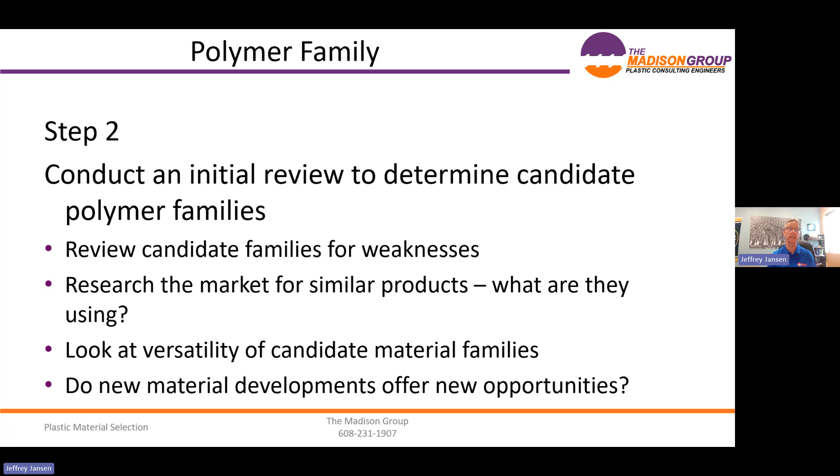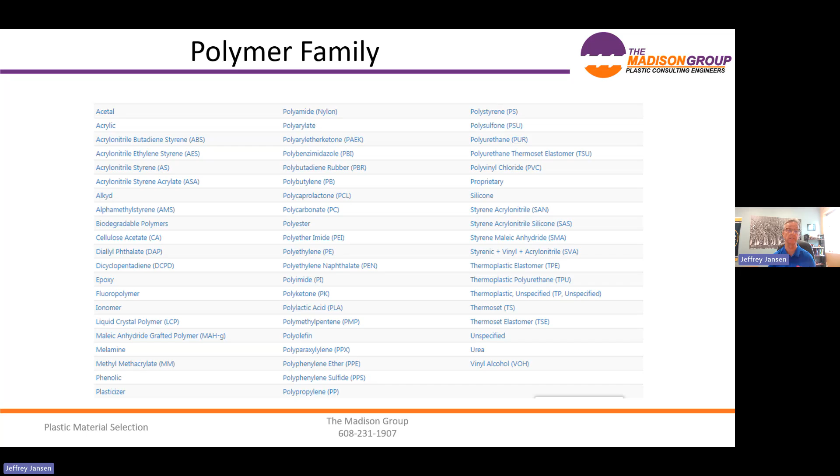Again, looking at all of these things, really excluding the additives, to look at which family of plastic I'm going to use. There's a lot of different families, so we want to look at all of them.

Again, start with all the materials, start with basically this whole list, and then filter them out.

Step 3 is to look at additives. For example, if I need very stringent flame retardant properties, or if I need something to last a long time at relatively high temperature, I might need a different antioxidant package. So you start to look at additives that might be required specific to your application.

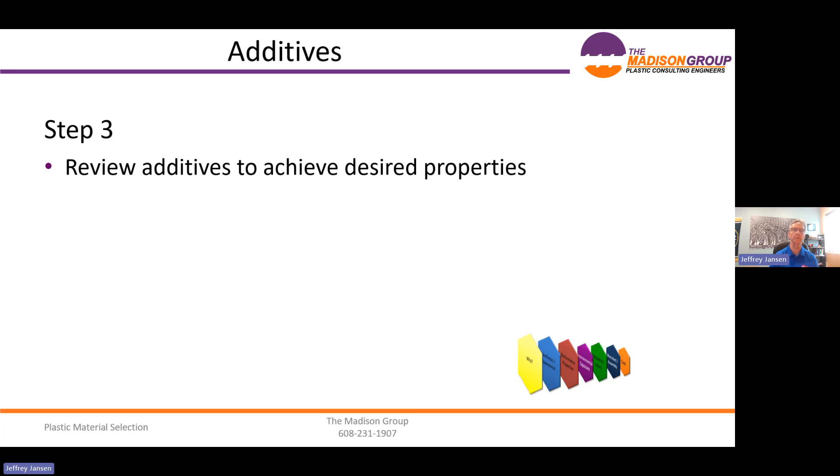Then review the design to look at how these part features are going to affect material selection, and balance that again. So material selection, product design, and manufacturing aren't something you throw over the cube at somebody. They're all done together, iteratively, but together.

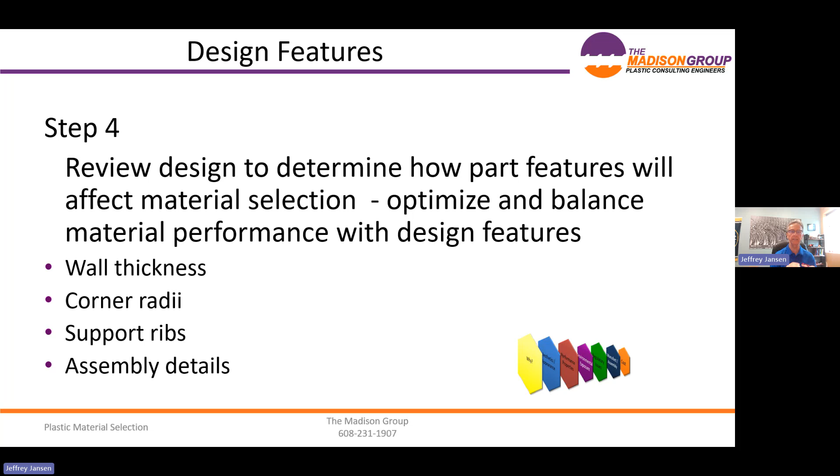So you want to look at things like the wall thickness, the corner radii, the ribs, the assembly details - all of those things in order to say what unique characteristics that means for my material.

Then we're going to look at costs. Cost means we're going to look at the entirety, including not just the per pound cost of the resin, but all of the manufacturing costs that go into it. So how much is this part going to be when I look at it?

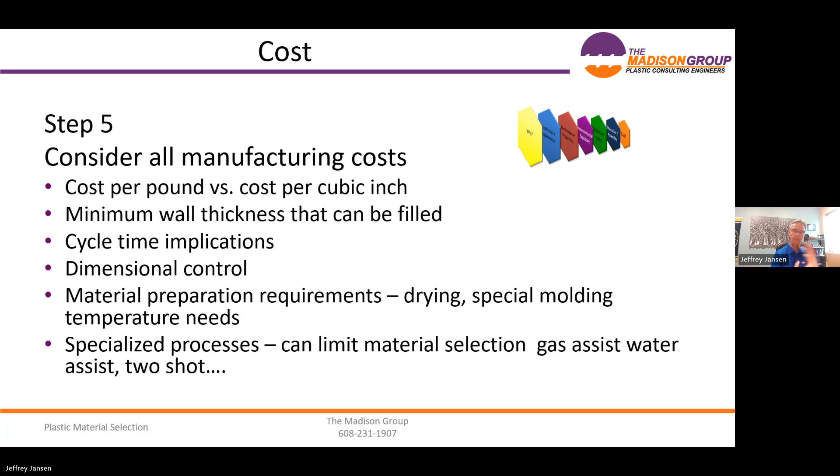Again, considering, when you think about cost, what am I putting this plastic part into? A lot of metal, a lot of expensive materials that when this plastic part fails, the whole thing fails. That's got to be a factor in cost, I believe also.

Then you want to conduct a process and performance simulation. Performance simulation would be FEA. We want to use properties unique to the specific materials we're considering at this point - not just generally polycarbonate, but if we're thinking about Lexan 101, what are the FEA performance properties for Lexan 101?

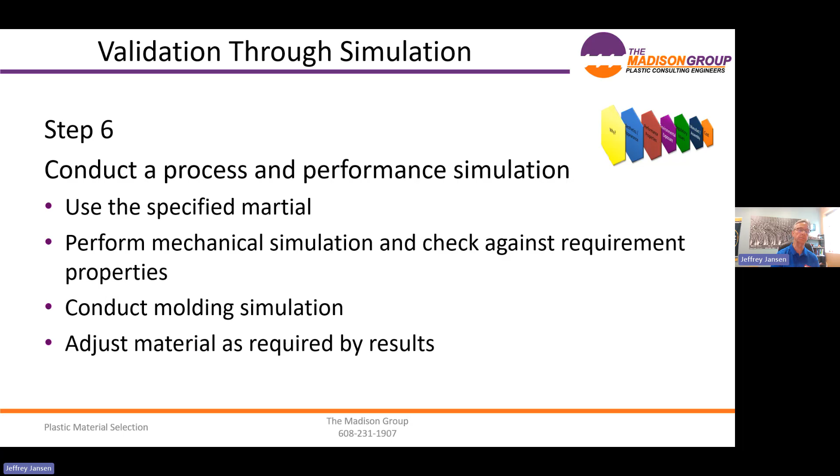The same thing on the process side - we want to do a mold flow, look at how this material is going to mold. Is it moldable? Is this the right material that way? Is the molecular weight too high so that my melt viscosity is too high and I can't get it to fill the tool? It's got to go hand in hand, so use the specified material, do those things, and see if I still have the right material.

Then actual comparative testing based on product requirements. Again, we're still at the material stage at this point - chemical compatibility testing, creep, impact, UV, whatever is unique or important to your application. That's the kind of testing that you want to do.

Finally, some keys to success. Again, understand what the part will experience in the field - you have to do that. Keep all the costs in mind. Find the right material property data, both single and multi-point.

Determine what tests need to be performed if you can't get all the data you need, and how to perform it the right way. Make sure that you do the right computer modeling, mold filling simulations, finite element analysis. Use past experience - like I said, it's an art and a science together. What's worked in the past? What hasn't worked?

Failure is a powerful tool for material selection. Understanding why and how something has failed will help you select a material to avoid that failure in the future. Have a good relationship with the material supplier.

Don't always beat them up about cost. Understand that they're providing you something very technical, and there may be a cost for that. Also, have a good relationship with your molder. They're an excellent source for material information.

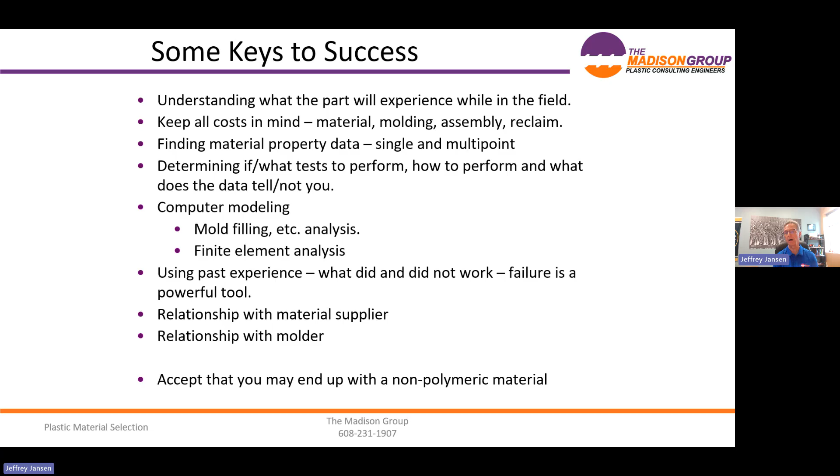In the end, accept that you may end up with a non-polymeric material. You may end up with a metal. We've all seen charts like this, pyramids or triangles, where we've got kind of a hierarchy of materials.

I just want to spend a minute saying there's no such thing as commodity polymeric materials. That term absolutely aggravates me, because when we talk about commodity, we talk about interchangeable. We simply know that different grades of polypropylene, polyethylene, ABS, whatever you consider a commodity material, they're not interchangeable. One grade of polypropylene is not going to perform the same way as another.

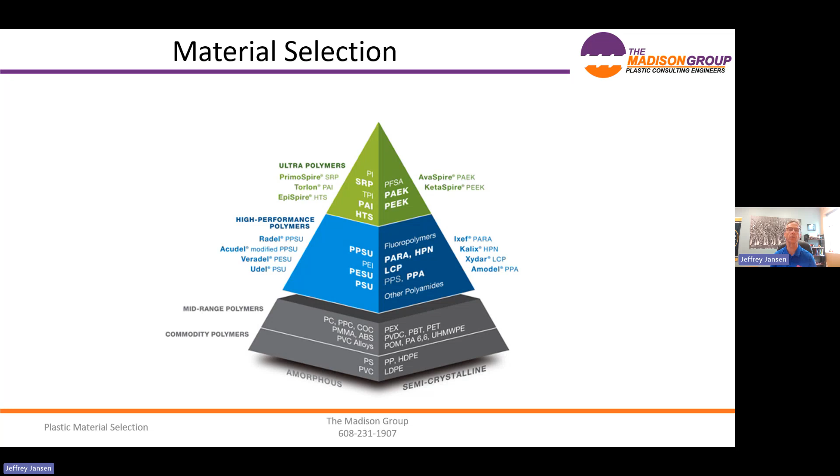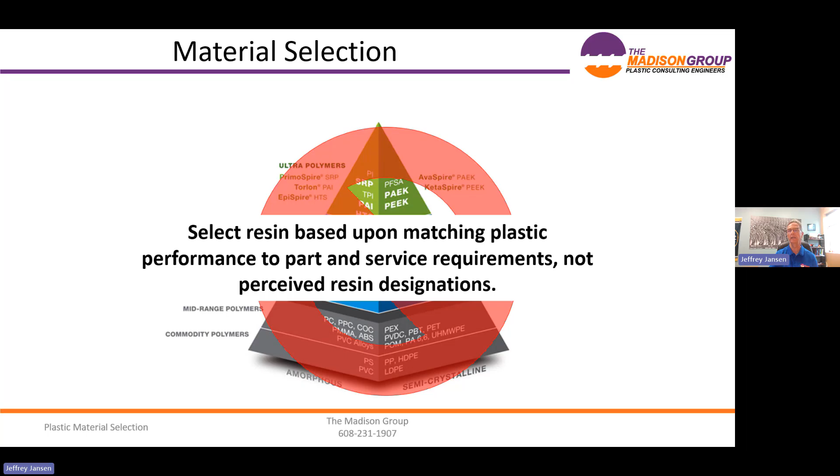So don't get that mindset where we think about commodity materials. Don't think about hierarchy. Think about what properties do I need to satisfy and which material is the right way to do that.